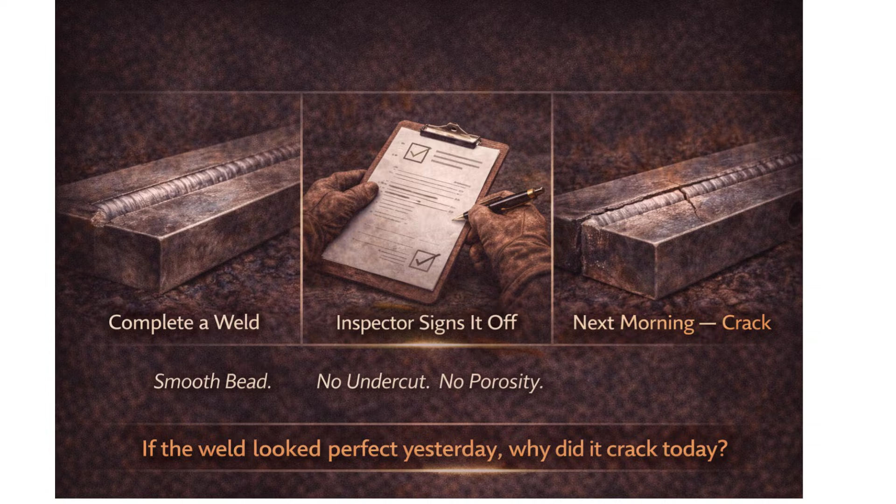Now the big question: if the weld looked perfect yesterday, why did it crack today? Most welders blame electrodes, some blame base metal, some blame luck. But in many real cases, the actual reason is simple and ignored: no preheating. Today I'll explain why preheating is required in welding, not from textbook theory but from real workshop logic, the kind that saves rework, rejection, and reputation.

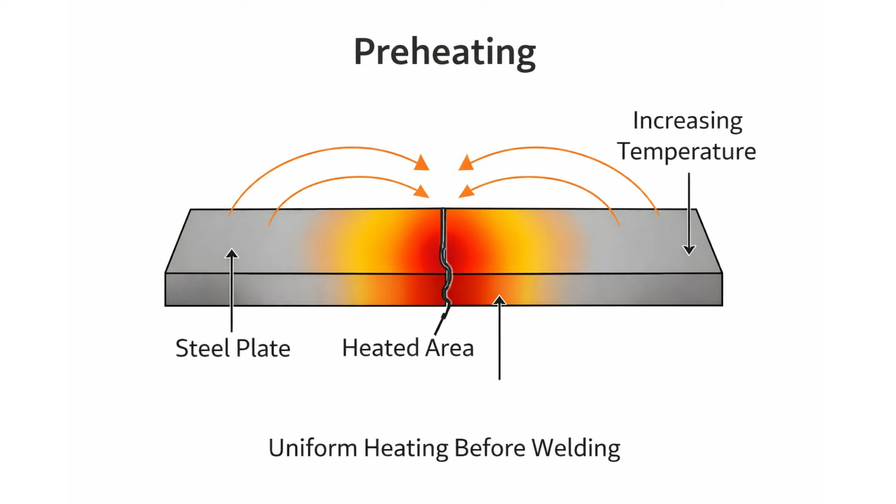So first, what exactly is preheating? Preheating in welding means raising the temperature of the base metal before welding, and sometimes maintaining that temperature during welding. This heating is done around the weld joint, on both sides, to a specified minimum temperature. This is not for comfort and not to make welding easier. Preheating is done to control what happens to the metal after welding.

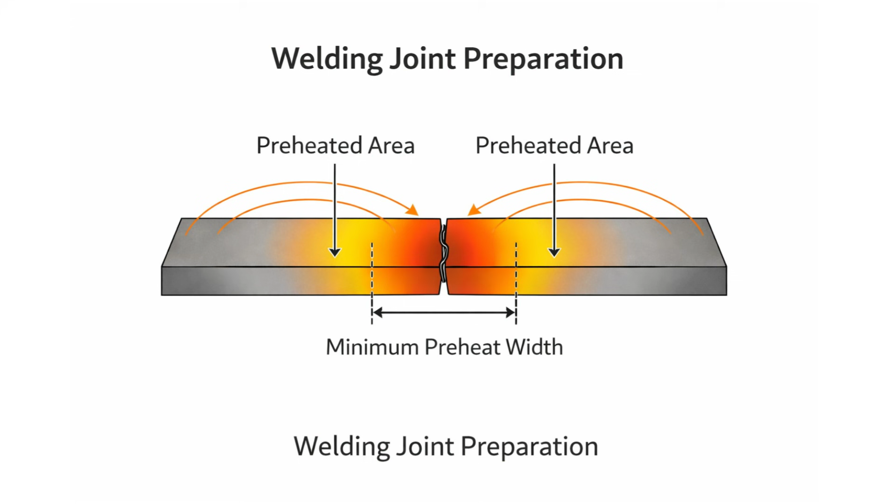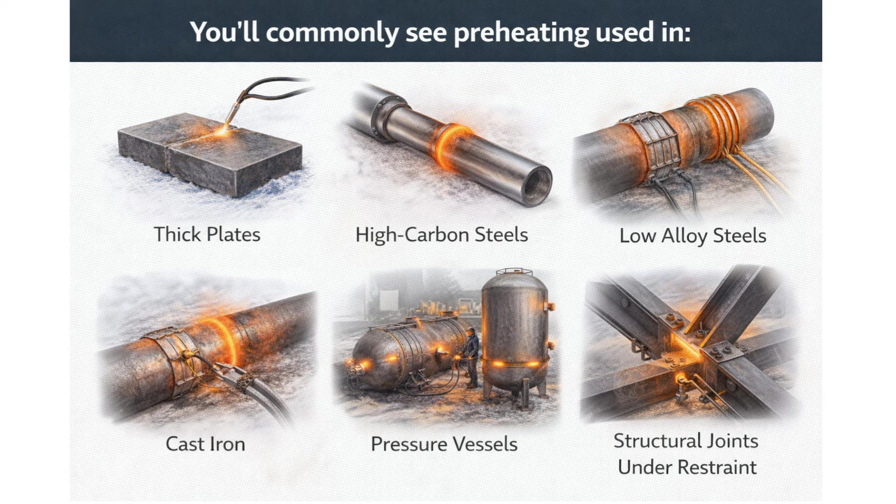You'll commonly see preheating used in thick plates, high carbon steels, low alloy steels, cast iron, pressure vessels, and structural joints under restraint. Now, the metallurgical reasons for preheating.

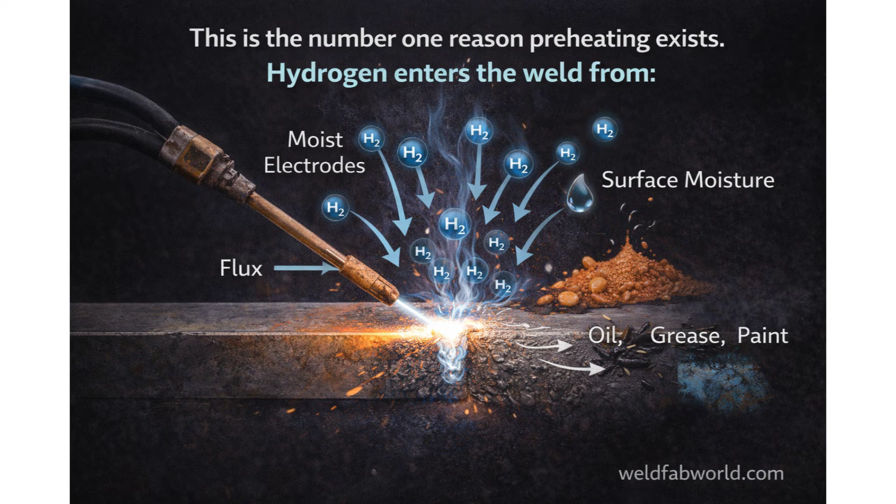Let's talk metallurgy, but don't worry, I'll keep it simple and practical. Hydrogen-induced cracking is the number one reason preheating exists. Hydrogen enters the weld from moist electrodes, flux surface moisture, oil, grease, paint. When welding happens, hydrogen dissolves into the molten weld metal. That part is unavoidable. The problem starts after welding.

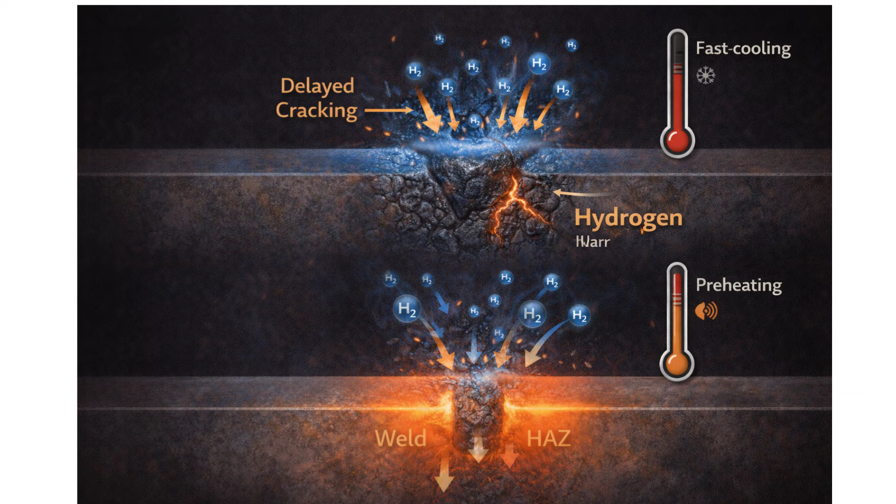If the weld cools too fast, hydrogen gets trapped inside hard microstructures and creates pressure. That pressure leads to delayed cracking, sometimes hours or even days later. Preheating helps by allowing hydrogen to escape slowly, reducing hydrogen concentration in the weld, and has the effect of slowing rapid cooling.

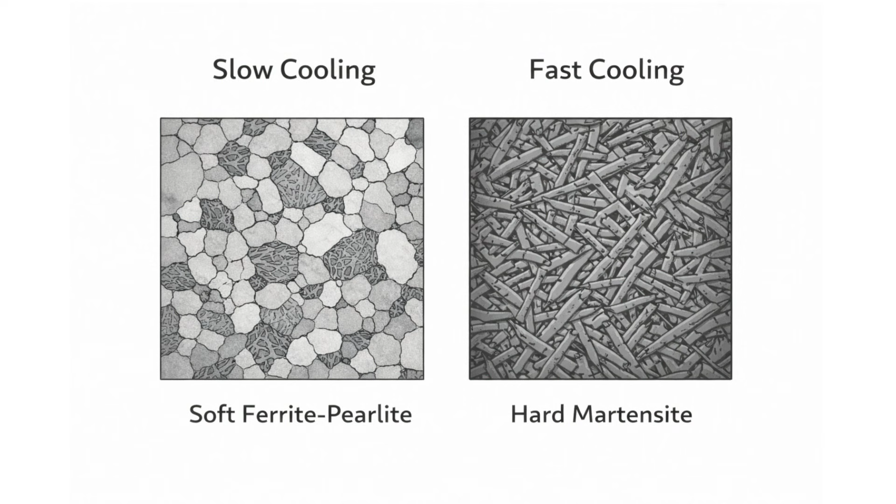Imagine pouring hot glass into cold water. What happens? It cracks. Steel behaves in a similar way. When cold base metal absorbs heat rapidly from the weld, the cooling rate becomes very high, and the heat affected zone transforms into hard and brittle structures. This is where martensite comes in.

Martensite is not a defect, it's a very hard but brittle structure. High hardness means high strength, low toughness, high cracking tendency. Martensite forms when carbon is present and cooling rate is fast. Preheating slows down cooling, giving steel time to form softer, tougher microstructures instead.

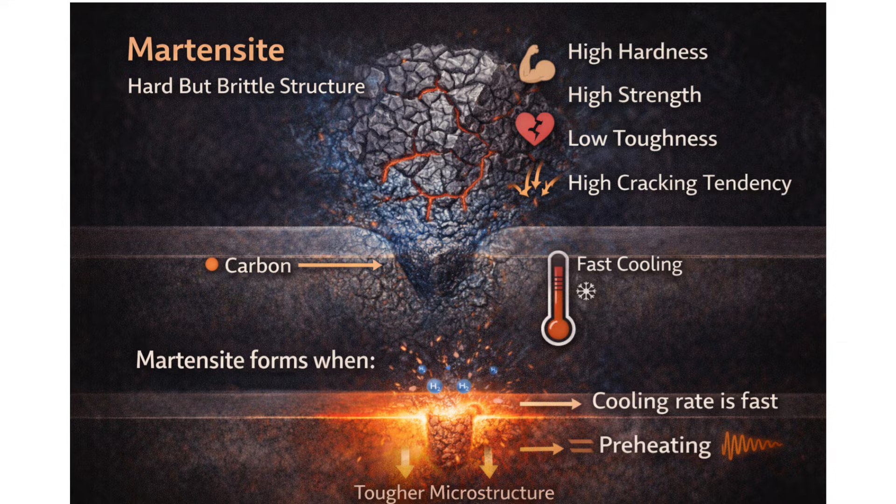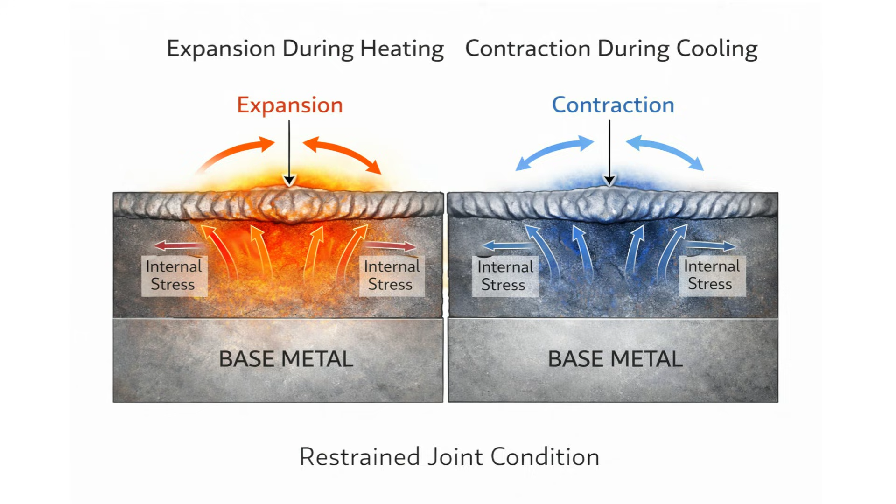Now let's talk about stresses. During welding, weld metal is very hot, while base metal away from the weld is cold. This temperature difference causes uneven expansion and contraction. As the weld cools, weld metal tries to shrink, but the base metal resists this shrinkage. That resistance creates residual stress.

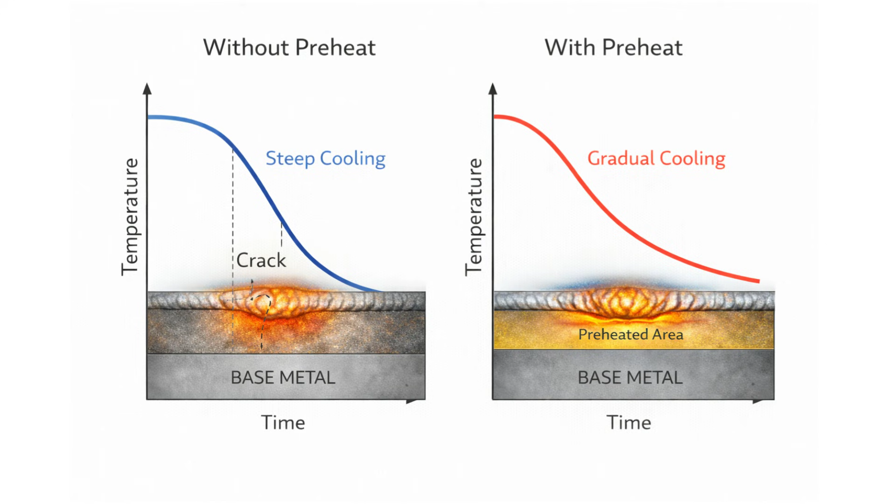If the material is hard and brittle, cracks form easily. Preheating reduces temperature gradients, cooling speed, and internal stress buildup.

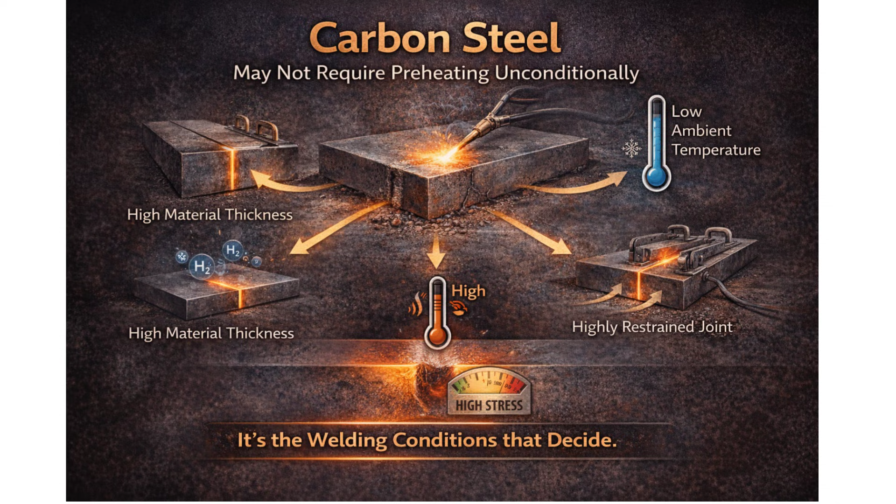Materials that require preheating: carbon steel. Low carbon steels generally do not require preheating under normal conditions. However, this is true only when certain conditions are satisfied. Preheating may still be required if the material thickness is high, the ambient temperature is low, hydrogen control is critical, or the joint is highly restrained. So remember this clearly: it's not just the material, the welding conditions decide.

High carbon steel almost always requires preheating. Why? Higher carbon means higher hardenability. Higher hardenability means higher hardness in the HAZ. Higher hardness means higher cracking risk. This is not optional and not debatable - preheating is mandatory in most practical cases.

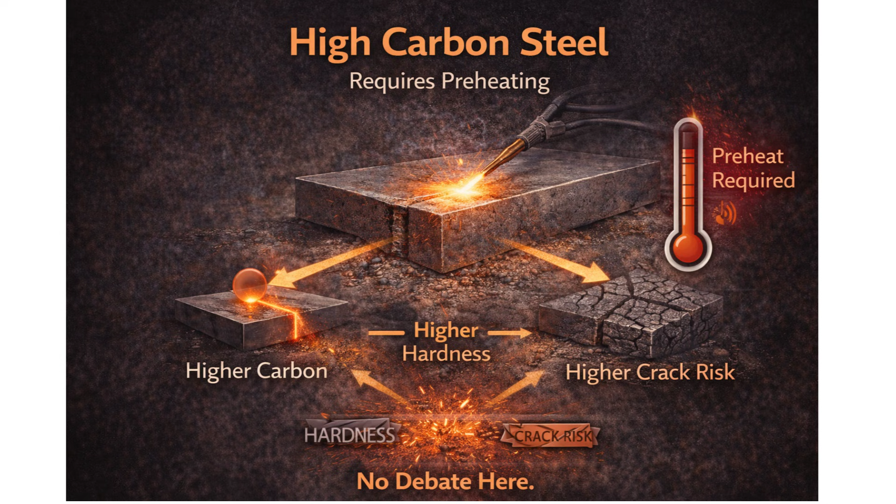Low alloy steels contain alloying elements such as chromium, molybdenum, nickel. These elements increase hardenability even if carbon content is moderate. As a result, cooling becomes more critical, HAZ hardness increases, and hydrogen cracking risk rises. That's why even medium thickness low alloy steels often require preheating.

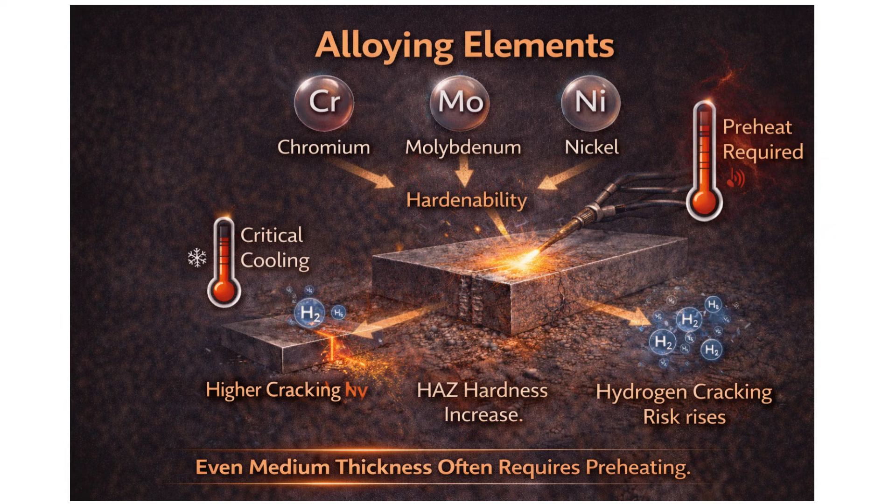Cast iron is a special case. It is very brittle, high in carbon, extremely low in ductility. Without preheating, cast iron will crack during or after welding. This is not 'may crack' - this is 'will crack.' That's why cast iron welding always requires proper preheating, controlled cooling, and sometimes post-heat as well.

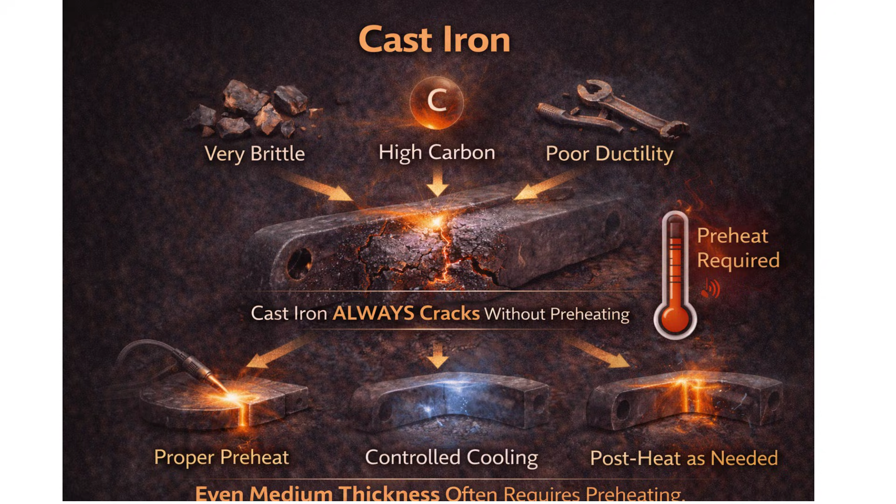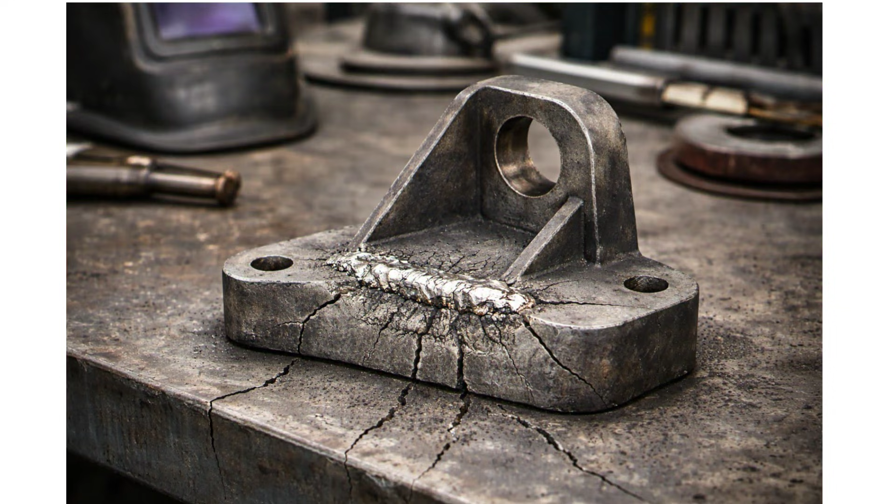What happens if preheating is ignored? Let's be very clear here. Ignoring preheating can lead to cold cracking after welding, cracks in weld metal, cracks in HAZ, repair welding, rejection by inspector, and loss of customer trust. I've seen pressure vessel shells crack overnight. I've seen crane components fail load tests. And in many cases, the root cause was no preheat.

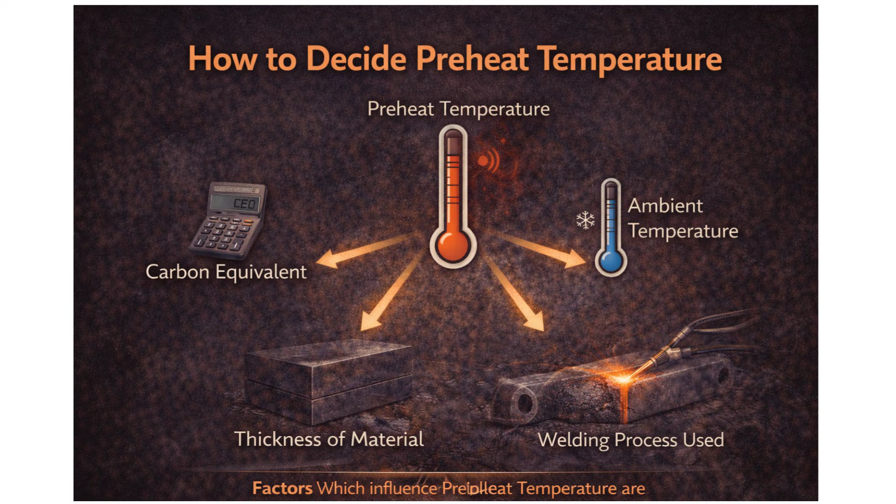Now the million-rupee question: how to decide preheat temperature? Factors which influence preheat temperature are carbon equivalent, thickness of material, ambient temperature, and welding process used. Carbon equivalent, or CE, combines carbon, manganese, and alloying elements. Higher CE means higher hardenability, higher preheat requirement. Engineers use CE to estimate cracking risk.

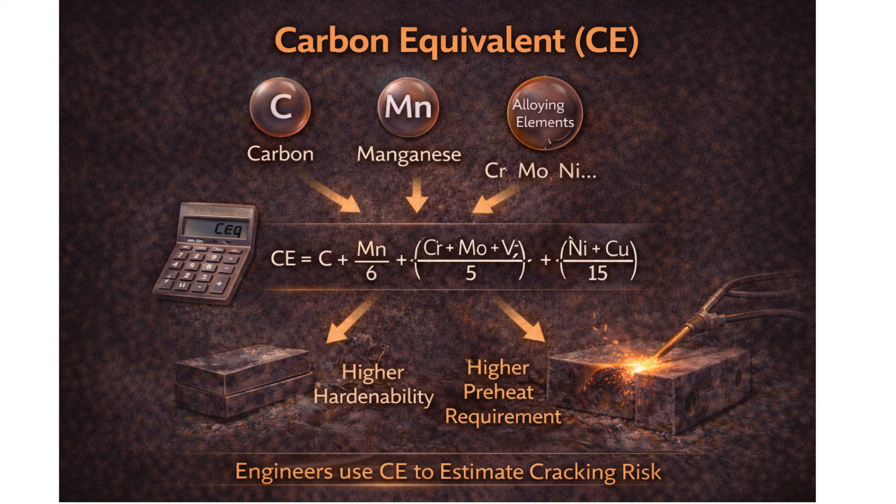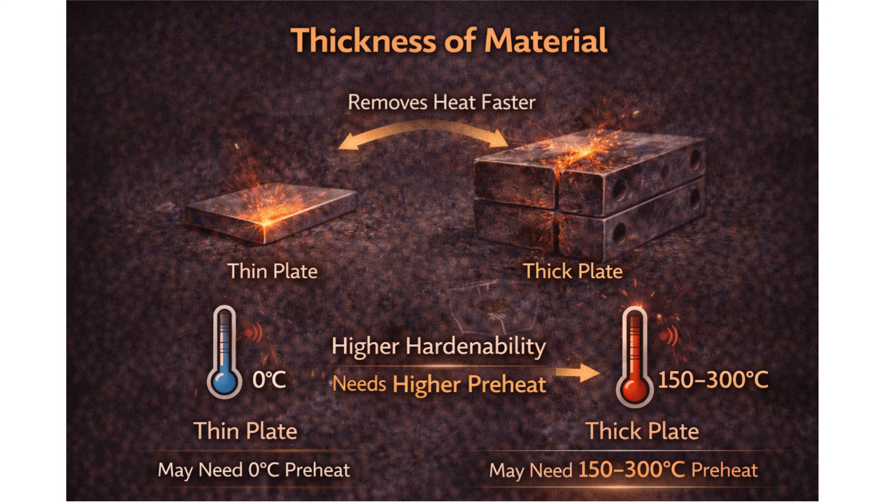Thickness of material: thicker material removes heat faster, needs higher preheat. Thin plate may need zero preheat. Thick plate may need 150 to 300 degrees Celsius.

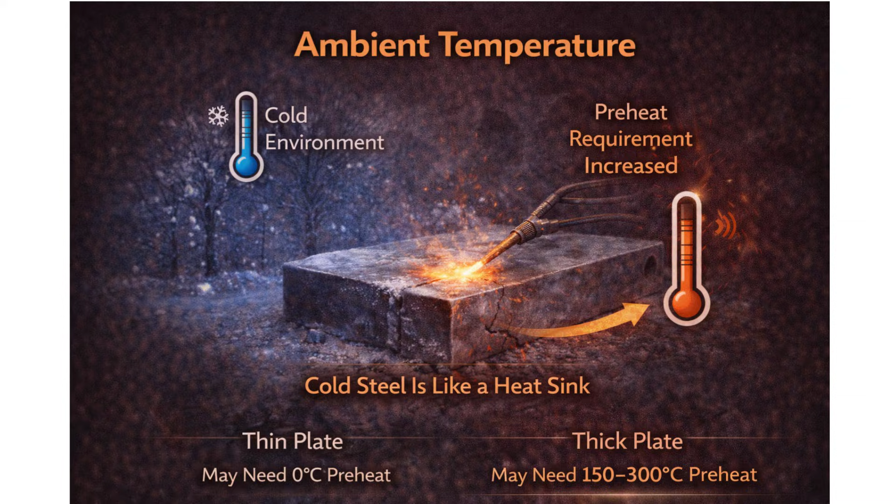Ambient temperature: welding in winter mornings or cold shops increases preheat requirement, since cold steel behaves like a heat sink. Welding process used: processes with higher hydrogen input and lower heat input need more preheat than controlled processes.

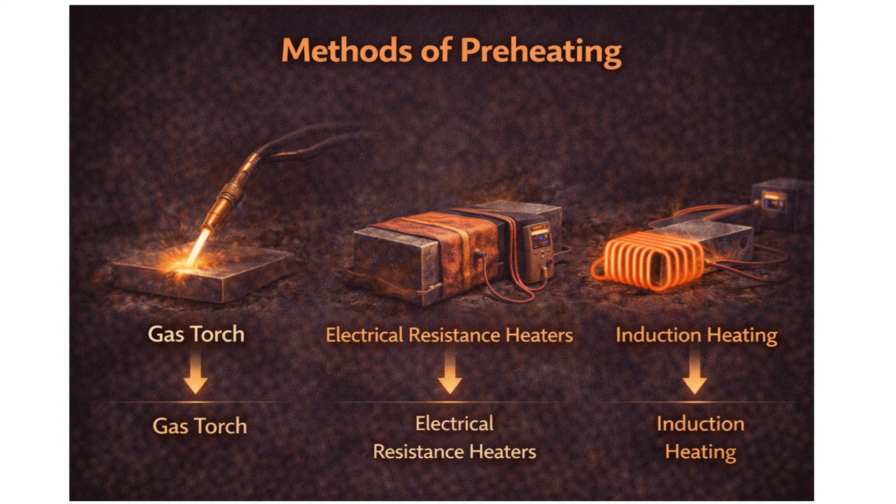Next we'll discuss methods of preheating. Common methods are gas torch, electrical resistance heaters, and induction heating. Gas torch is most common in workshops, good for small jobs and localized heating. Problem: uneven heating if done carelessly.

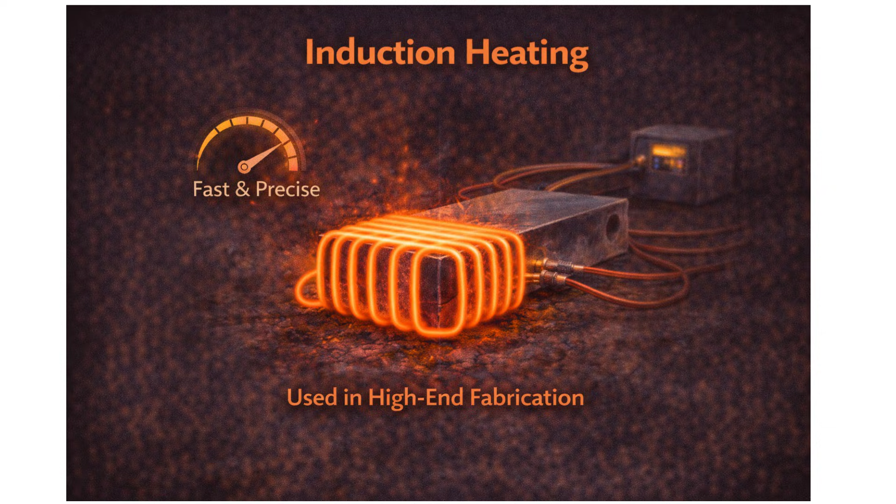Electrical resistance heaters are used in pressure vessels, pipelines, and critical joints - very uniform and controllable. Induction heating is fast and precise, used in high-end fabrication. Common mistakes during preheating: heating only one side.

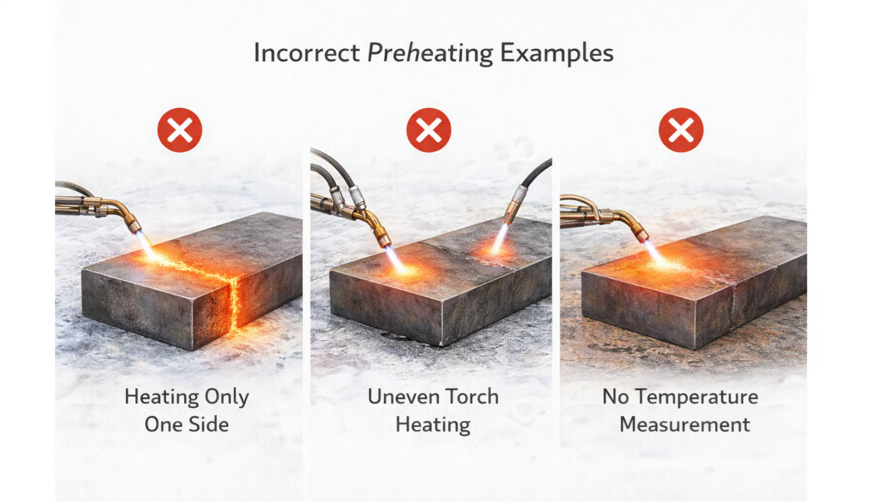Heating too small an area, not measuring temperature, stopping preheat midway. Preheating must be uniform and verified.

Codes or standards reference: preheating is not optional when specified by codes. Standards like ASME, AWS, and ISO clearly define when preheating is mandatory. You don't need to memorize tables, but you must respect WPS requirements.

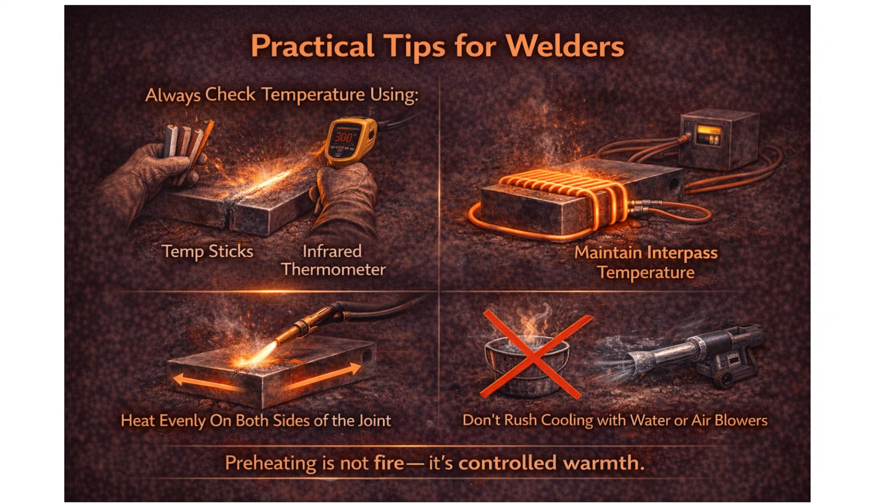Practical tips for welders: always check temperature using temp sticks or an infrared thermometer. Heat evenly on both sides of the joint. Maintain interpass temperature. Do not rush cooling with water or air blowers. Preheating is not fire, it's controlled warmth.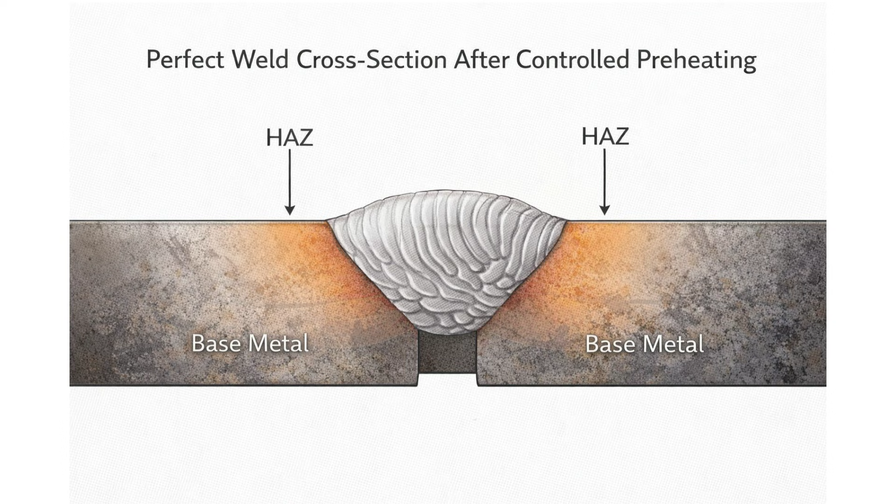So let's wrap this up. Preheating prevents cracking, controls hydrogen, reduces stress, and increases weld life. Yes, it costs time. Yes, it costs fuel or electricity. But repairs cost more. Remember this line: preheat doesn't improve weld looks, it improves weld life.